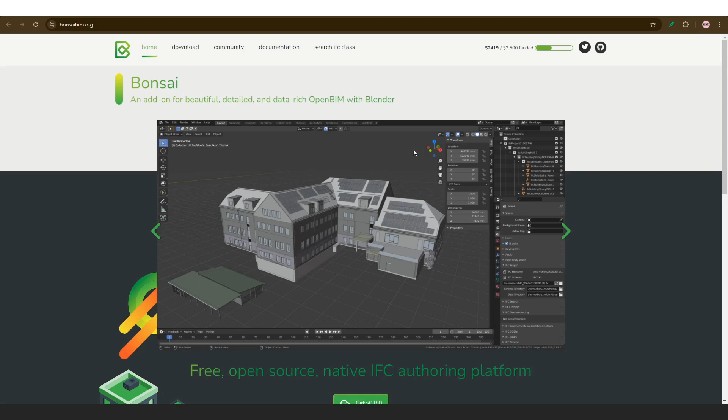So if we click on that, we can see it now just says Bonsai, but it's the same layout, it is the same website, it's the same add-on. This release simultaneously contains a ridiculous amount of sweeping under the hood changes and UX work. Due to the sheer volume of new stuff and changes, please treat this release as more experimental than usual.

Beta testing and reporting bugs would be really appreciated. If you want to try something out and you find a bug or a problem, please report it and it can be sorted out swiftly. Okay, deep breath, get ready, go.

So this is our new Bonsai release. You can see there's a little bonsai plant and then the bunny, and then the new Bonsai, well, it's the same old logo. It's the B logo. Hello Bonsai, rebrand from the BlenderBim add-on. The same software, same community, new name. The BlenderBim add-on is now known as Bonsai.

What initially started as a discussion with the Blender Foundation about their updated branding guidelines has resulted in a completely new, distinct brand. Bonsai is a comprehensive interface to the IfcOpenShell suite. Our name reflects the precision, detailed craft cultivation, and community behind the shared vision. The name was decided by a community in 8 pages of forum discussion.

There were tons of other names considered. Also, rabbits next to the little trees are so cute.

Absolutely. Okay, the first big one, support for IFC4x3 geometry. Alignments, linear positioning elements, and references are now supported. IFC4x3 is now an official ISO standard. It's the latest one. Many users in the infrastructure space are asking where can I view my infrastructure geometry. Some viewers won't show 2D or 3D curves, let alone infrastructure curves.

This also includes more complex 3D forms like sectioned horizontal solids. There was a huge amount of work to achieve this over many months, and the best thing is that it's invisible to users. Just load your models. The next one is the upgrade to IfcOpenShell version 0.8. We've been using 0.7 until now.

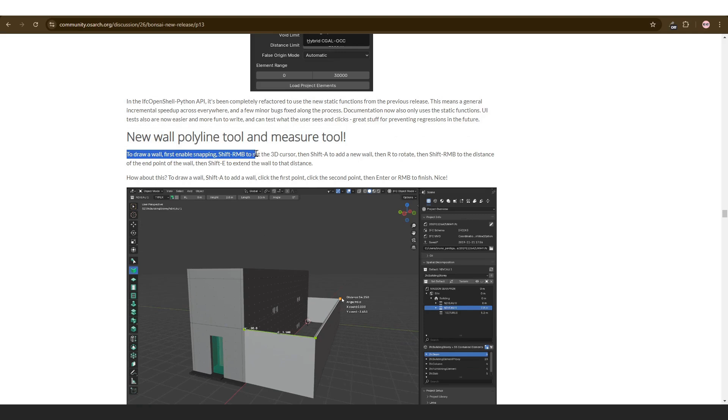Okay, the new wall polyline and measure tool. To draw a wall, first enable snapping, Shift right mouse button and set the 3D cursor. Then Shift A to add a new wall, then R to rotate, and Shift right mouse button to the distance point of each wall, and then Shift E to extend that wall. That is the old process, essentially. How about this? To draw a wall, Shift A to add the wall, click the first point, second point, then Enter, or right mouse button to finish.

Alright, so I've just got my Blender file open, I've got a Bonsai project created, and I'm just going to select a 300 wall with the wall tool, and then here it is, Shift P, and then you can just click, click, click, click, and then Shift C to close it, and you press Enter, and it will generate a wall just like that, however you want it to.

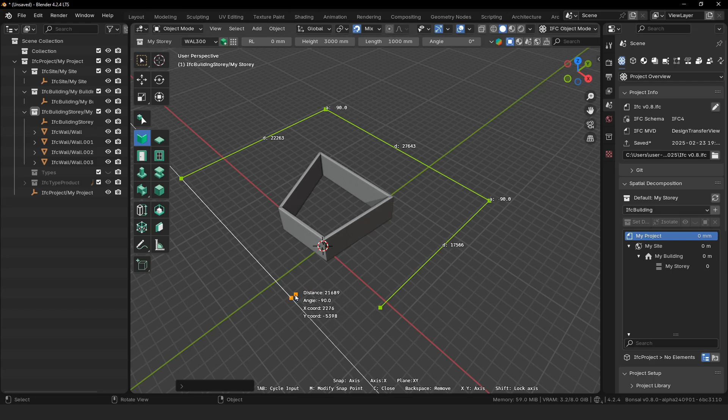If you want it to be orthographic, you can just say Shift P, click, and then just tap X, and it'll snap in the X direction, Y in the Y direction, so on and so forth. It's very, very fast and intuitive. Shift C, Enter. All right, that's it.

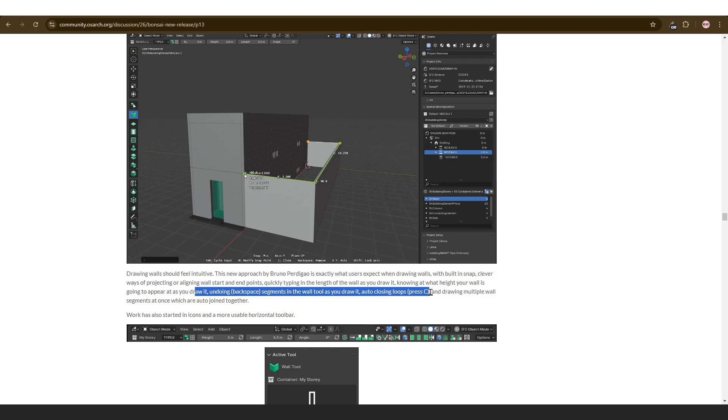Drawing walls should feel intuitive. This new approach by Bruno Perdigao is exactly what users expected when drawing walls, thank you Bruno. With built-in snap, clever ways of projecting or aligning wall start and endpoints, quickly typing in the length of the wall as you draw it, knowing at what height your wall is going to appear as you draw it, undoing segments with backspace as you draw, auto-closing loops with C, and drawing multiple wall segments at once, which are auto-joined together.

Work has also started on icons and a more usable horizontal bar. There is also a new measurement tool. You'll notice this follows a similar approach to the wall tool. If you can use one, the other uses the same logic, essentially. Here, if we have the wall tool, and I press N, we can say load thumbnails, and you can see if I select the walls, there's considerably more tools available here with a lot more annotation and descriptions of what each one does. It's a bit more fleshed out.

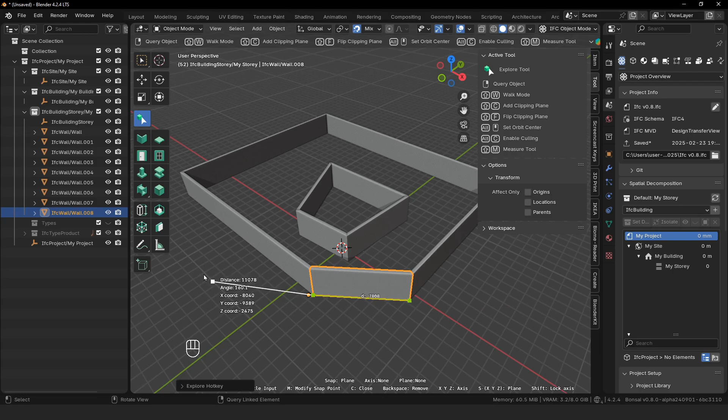Then for the measure tool, we have to select the explore tool first. And then here at the top, you can see it says Shift M. That's the hotkey. So we can say Shift M, and then we can snap to a point and measure it. We can measure up, we can measure sideways, we can measure everything, essentially. And it's snapping as it goes. Right, that is it. So now there's icons for extend, butt, miter, unjoin, merge, split, rotate, flip, and voids. And then here's an example of the measure tool.

Geo-referencing: better false origin handling and coordinate operation support. Handling coordinate systems and large coordinates has seen a complete overhaul. IFC defines all geometry in terms of the local engineering coordinate system, and additionally may define a coordinate system with a transformation to convert between local and map coordinates. Previously, all models were loaded such that the Blender origin coincided with the IFC local engineering origin. If you had two models geolocated in different parts of the world, or different parts of the same site, Bonsai would still load their local origins on top of one another.

In general, all IFC viewers have this incorrect behavior, except for specialist software dedicated to showing it properly, like IfcGref or ArcGIS. Bonsai now supports federating models together, true to their map coordinates, not just their local coordinates. You can take many models across a city or site with different origins, project norths, or even project and map units, and they'll all come in correctly from opening, linking and, yes, merging.

Even obscure combinations of both map conversions and rotated custom world coordinate systems are handled. To my knowledge, this is the most advanced and correct implementation out there. The only thing not supported is reprojection across different coordinate systems.

In addition, where coordinates are very large, and where there are conflicting, irreconcilable coordinate ranges within the same model, Bonsai's ability to pick a meaningful, session-specific false origin is now faster, more accurate, and more customizable, including a new disabled mode, and it handles really strange coordinate combinations which we see out in the wild. Users can also now interrogate elements with problematic coordinates and fix them, or set a temporary session-specific project north.

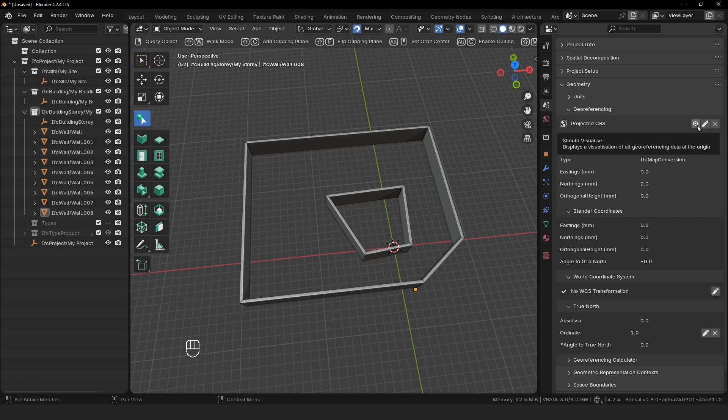If we zoom in, and I'm just going to go here, we can see our project, grid, and true north, which are all different things, all aligning at the moment.

And if we just want to adjust these, we can edit this top one here, and we can put in an angle, let's say 30 degrees. You can see that adjusted our grid north, even though our project north is still straight up.

And then here with true north, we can edit it as well. There's also an angle we can put there. I'm going to say 45 degrees and say edit, and there true north has been adjusted. It's a very comprehensive system.

All right, moving on. BCF version 3 support. In addition to a ton of BCF bugs fixed by Bernd, thanks to Andre, the Bonsai interface now has support for loading and creating BCF XML version 3 files. Previously only BCF version 2.1. Hooray! Thanks for the update.

Quite a large change and addition. There's a new web interface for scheduling, Gantt charts, and more. More is 2D drawings and other stuff.

Despite Blender's phenomenal extensibility, there are some areas where Blender's interface falls short. It's great at 3D, but not so great at spreadsheets, page layouts, Gantt charts, long-form text areas, and highly customized interface widgets. In contrast, the web is really good at this type of flexible interface, and vice versa, it doesn't do well with graphics. What if we could have the best of both worlds?

Ziad set out to do exactly that. Bonsai's code is largely decoupled from Blender. This means that we can reuse the exact same code across any interface or app, like FreeCAD. Ziad has now built a new WebSocket-based web interface that you can launch alongside your Blender session. For this first release, you'll notice that spreadsheet and scheduling now default to displaying tabular data directly on the web instead of having to save the file and reopen it in another spreadsheet software.

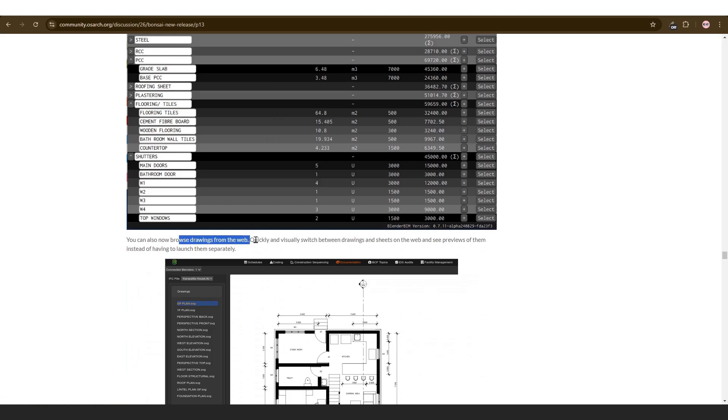You can now also browse drawings from the web, quickly and visually switching between drawings and sheets on the web and see previews of them instead of having to launch them separately. It's quite a useful way to just manage your drawings throughout the whole project.

You can now also connect multiple Blender sessions together and see their data together in a shared web interface. This is just the beginning. For those who want to learn how to build your own web interface, a tutorial demo module has been extended.

So we're back in Bonsai. For this, you need to save the file, you need to create a plan, and from here, we're just going to print, we're going to activate, we're going to print the drawing, and then we're just going to use this extra new document, this new button that says Open Documentation Web UI. You click on that, and it will open up a new web user interface that you can use.

Select the IFC. It says here connected Blenders 1, and then the IFC file you've got selected. Then you can just select - we're in documentation. These are my two drawings in the file, basically.

And we can go to construction sequencing. I can load whatever construction sequence we have. You see this is a Gantt chart that I made in the IFC file. It looks pretty good. You can edit it here.

And then costing, same story. We just elaborate on that. And you can see we've got values and lengths and quantities. These aren't real, but it's just to showcase the web UI.

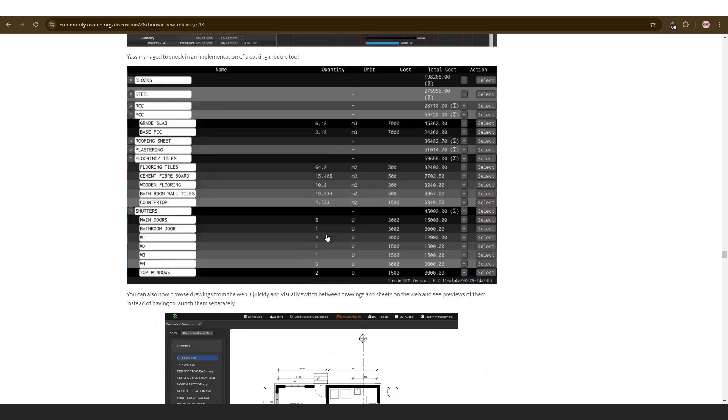And yeah, there's also schedules and BCF, IDS, and facilities management. This was part of the Google Summer of Code, and Ziad is the main contributor responsible for this web interface. So thank you so much, Ziad.

Experimental light simulation integration with Radiance. Although Blender offers very powerful artistic rendering capabilities out of the box, lesser known is how to perform light simulation in Blender itself. Essentially, Eevee and Cycles, Blender's default rendering engines, although they are fantastic, are not really accurate in regards to light simulation, and Radiance can fill that gap.

Chirag, the Google Summer of Code contributor, has made an excellent start to this. We now ship with Radiance and can produce renders directly from the IFC with Radiance. Users can pick simple physical material definitions from Spectral DB, define a camera and sun location based off of IFC True North and Geo-Referencing data. The module handles the conversion from IFC to OBJ to RAD formats under the hood, and users can configure basic rendering settings and material mappings.

So this is also taking us a long way to integrating Blender and Bonsai into kind of like a seamless approach. All right, next one, which is also quite exciting.

There's a new solar analysis tool. Blender has an excellent sun position add-on, which is there by default. If you are an architect or work in the AEC industry, and you use Blender, this is probably one of the most useful ones because it gives you accurate lighting positioning information, which is able to calculate azimuths, altitudes, solar positions, and analemmas.

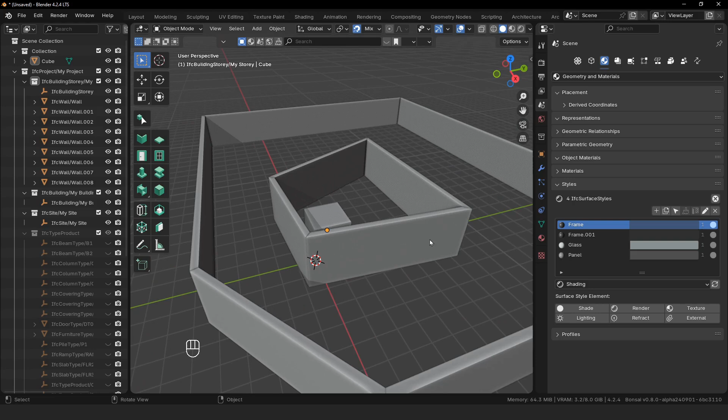Back in Bonsai, go from project overview to geometry and materials, then come down to styles, and click load surface styles. These four should be in there by default if you're using the IFC4 demo library. Select one of your objects, go to styles, select the style—I'll select frame—and then there's this little paintbrush icon, assign style. That's it, as simple as that.

Moving on: flexible collections and the new Spatial Manager. In previous versions, managing the spatial tree was done in the outliner, which had a number of limitations. For larger projects, you'd end up with a very long list of objects, and it wasn't possible to understand what objects you had, or how many stories or spaces, without collapsing and expanding collections and manually filtering and counting.

Another problem is that it took away the flexibility of Blender's collection system. You couldn't have objects assigned to multiple collections, or ad hoc create and reorganize custom collections like regular Blender. This led to bugs unless you knew the exact rules of what could be nested in what, and blurred the lines between spaces, object groups, aggregates, and sub-element groups. If you had an aggregate shared across multiple floors, because of the old hierarchy system, you didn't really know where the aggregate was sitting.

In IFC4x3, other relationships like covers or nesting are increasingly common, which could lead to very deep nested spatial trees. This deep nesting and collection-based way of managing the tree also meant load, save, and drawing generation times were unnecessarily long, with a risk of creating sync bugs. A huge change has been made to how the spatial tree is managed to address all of this.

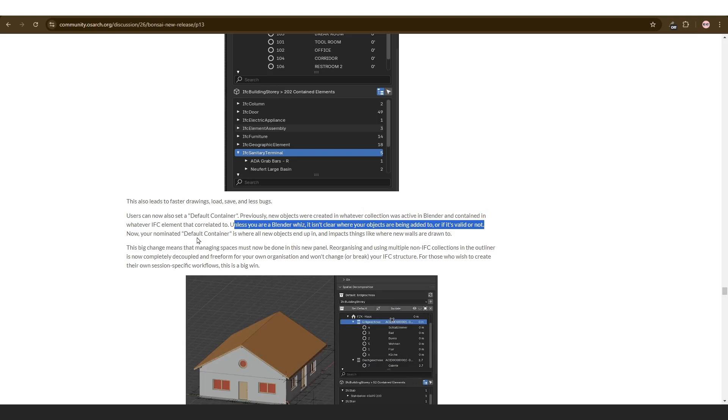Now your nominated default container is where all new objects end up, and it impacts things like where new walls are drawn to. The big change means managing spaces can now be done in this new panel. Reorganizing and using multiple non-IFC collections in the outliner is now completely decoupled and freeform from your own organization, and won't change or break your IFC structure. For those who wish to create session-specific workflows, this is a big win.

You can see a GIF of things being managed from the spatial outliner. Essentially, we go to the project overview, then spatial decomposition, which is a new panel. At the top here we've got the site, building, story, and inside that we've got the 9 elements - the 9 walls, essentially.

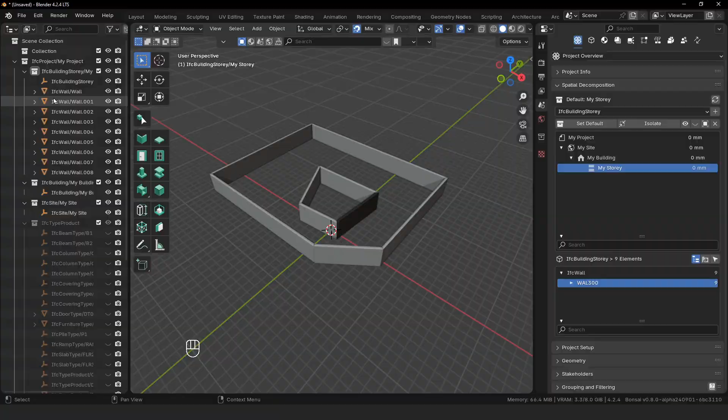All right, that's it. IfcTester now supports IDS version 1.0. IFC Patch is now friendlier and batch processes models. IfcTester now supports the new requirement for IDS for lowercase booleans, or 0 and 1, has more detailed failure messages for predefined types, and handles restrictions on data types. JSON reports are also more comprehensive for those integrating into their own systems. Auditing nested relationships for IFC2x3 is now supported. IfcTester can also select multiple IFCs and multiple IDSs and run them all in one go, a game changer for large projects, thanks to BD.

Reporting is now redesigned and shows more information, like where the IFC schema version is accepted in the IDS, as well as passing elements, not just failures. When an IDS specification applies to an occurrence, the result automatically groups occurrences by type if they exist, and clusters occurrences so you can get a feel of common problems by type rather than a huge list of occurrences.

IFC Patch recipes are now easier to use. There are new drop-down menus to select configuration options, file browsing to open files, and sensitive coordinates preserve precision. You can now merge projects in bulk rather than one by one. So this is the IDS output, and it's quite useful.

All right, next is improved color legends. When auditing models, we often want to visually check whether properties are correct. The color by property panel now lets you quickly pick a property from an active object and apply a color legend to it. Two new color schemes are now available for categorical and qualitative data analysis, and new view presets toggle flat coloring to make colors pop and easy to spot. For quantitative analysis, there are 4 new color legends - 2 for min to max ranges and 2 for diverging palettes highlighting the average, with an automatic or custom minimum and max.

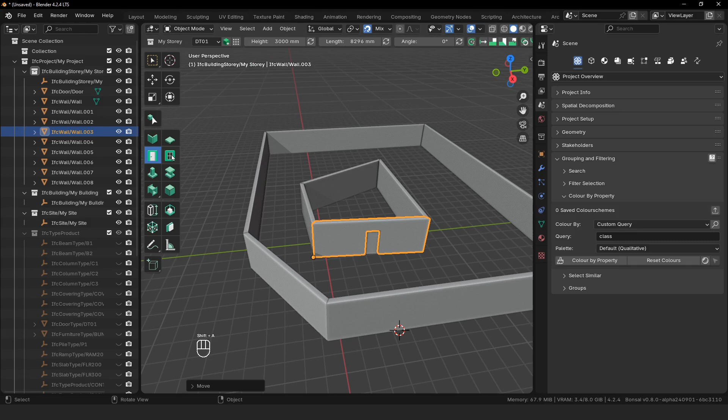What you want to do is come over here to Project Overview, and go all the way to the bottom to Grouping and Filtering, then to this new tab, Color by Property. So we can color by query - we're going to use class as our generic one. I'm going to add in a few more classes so you can see the difference here, so we're adding in a door and a few windows into some of these walls. So, custom query, class, and I'm just going to leave it on the default palette, and say color by property - and you can see suddenly it's very visual and it's very easy to distinguish different classes, and that's the whole purpose of this thing.

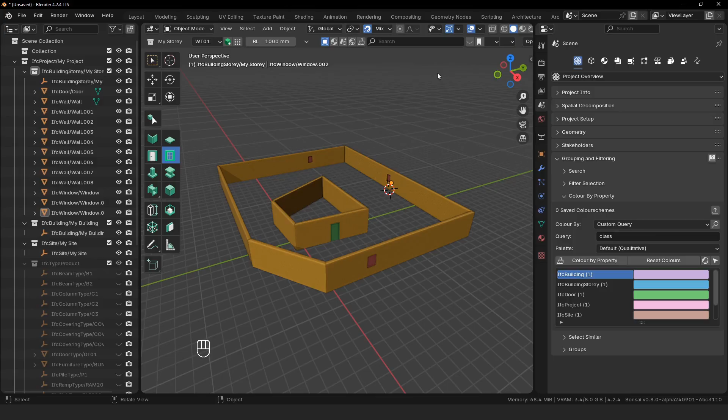All right, moving on - the new bisect mode and freestyle mode for drawings. A drawing is composed of a possible raster render in the background, followed by projection background line work. The line work is then potentially filled or colored in, then there's the actual cut objects, and finally the annotations. Previously, here's an example from opening design - the hidden line rendering for background projection work, as well as the cut line work, was calculated by OpenCascade. OpenCascade is quite slow to perform this, and this doesn't work well for organic forms.

For heritage or landscape architecture, the new default bisect cut mode uses Blender's built-in bisect tool to perform the cut, and is generally faster and more robust against strange and non-manifold geometry.

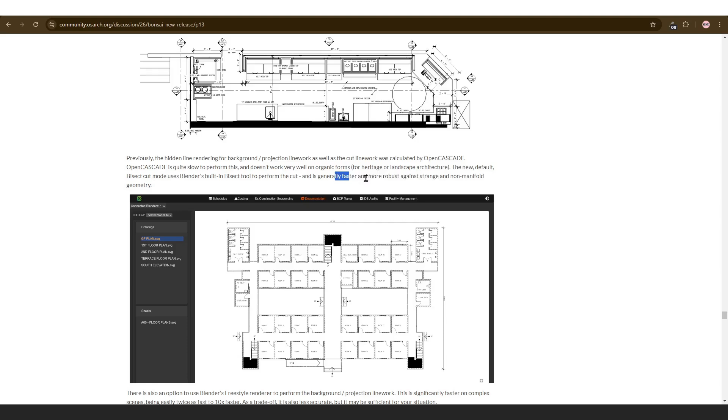There's also an option to use Blender's Freestyle renderer to perform the background projection line work. This is significantly faster on complex scenes, being easily 2 to 10 times faster. As a trade-off, it's less accurate, but it may be sufficient for your situation. It also doesn't allow for vector background fills yet.

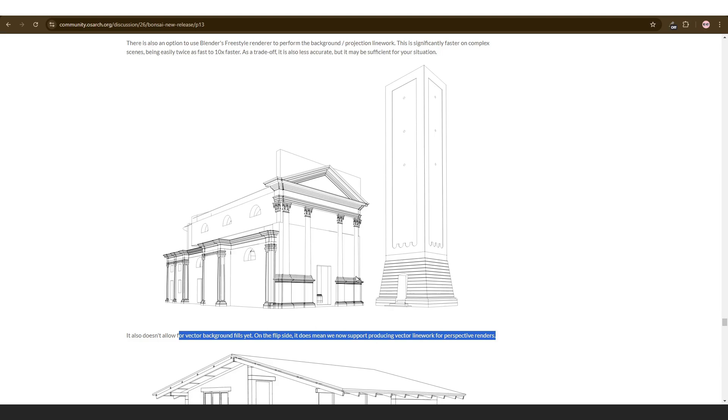To drawings and documents, we're going to go to drawings. We're going to go to our My Storey Plan. I'm going to activate that. I've added in an object that has quite a bit of tessellation. And what we're going to do here is I'm going to activate and print this drawing. And you can see there, this is using our original cut line work mode.

So if we go here, it says line work mode, OpenCascade. So that's the original one. And you can see the cut mode, there's the other option, bisect. So that's just a bit faster way to generate drawings, essentially, but it's a little less accurate.

So here we can change this from line work mode to Freestyle. And the first time you do this, it's just going to take a bit longer to generate the drawing, but don't worry. We're going to activate it, and then we're just going to print again. And you can see the difference there.

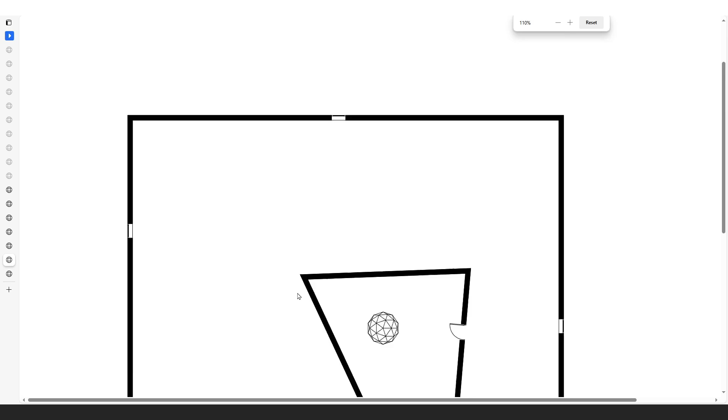Here is the original line work mode, which is OpenCascade. You can see there's all the tessellation, the triangles. And then here is Freestyle, and you can see it gets rid of the triangulation, basically, the unwanted triangulation.

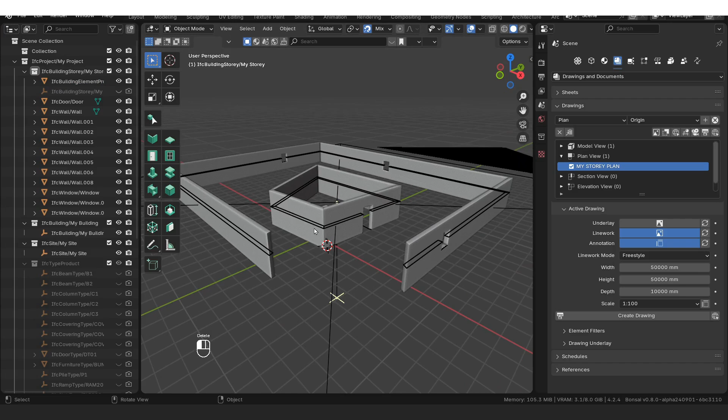All right, the other advantage of Freestyle is we can now do perspective renders, basically, perspective shots. So I'm just going to delete this wall, and I'm going to delete that one, just to make something slightly more interesting. And what we're going to do is we're going to go now to Model, and you can see here next to Orthographic, there's a perspective option.

We're going to say plus. It's going to add in that perspective camera. So in model view, there will be a perspective camera. You just need to activate it. We saw that it was facing down, so I'm actually just going to go out into 3D space, and I'm going to bring this up, and I'm going to activate it again.

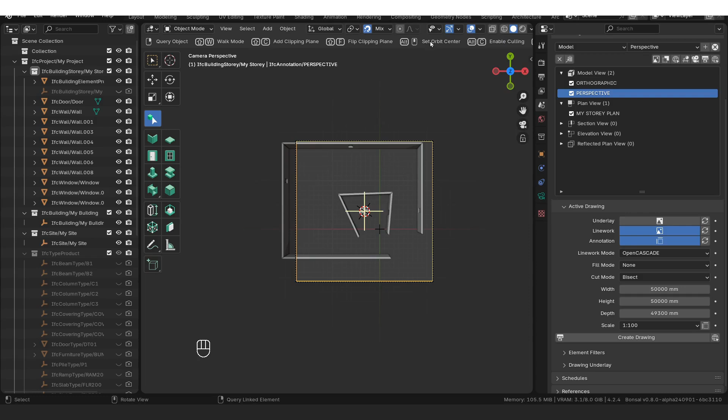What I'm going to do is just increase the depth so it can see more of the scene. So activate, there we go. So we can see more of the scene. I'm just going to grab this, and I'm just going to use the Explore tool, and I'm going to say walk mode, so Shift W.

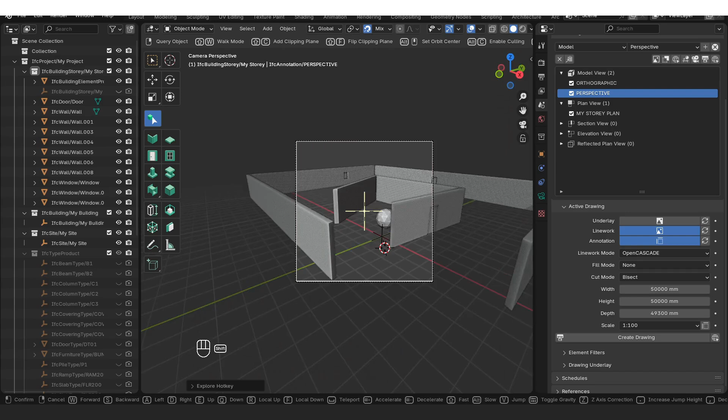And then that will allow me to walk around using W, A, S, and D, or your arrow keys to move the camera around. And I'm just going to choose a fun angle for our perspective, like this perhaps, just from above. And then we just need to increase our depth so we get more of the scene in the shot. There we go. Okay, so the perspective shot.

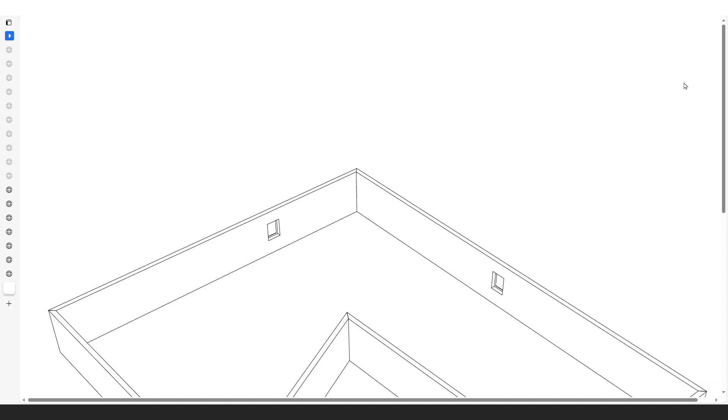So this has to be done with Freestyle. Open Cascade cannot do the perspective shots. So we're just going to say Freestyle. We're going to activate, and then we're going to print this. And there you can see there is a perspective shot. It was basically instantaneous. And you can do any number of complex structures, buildings, shapes. All right, that is it.